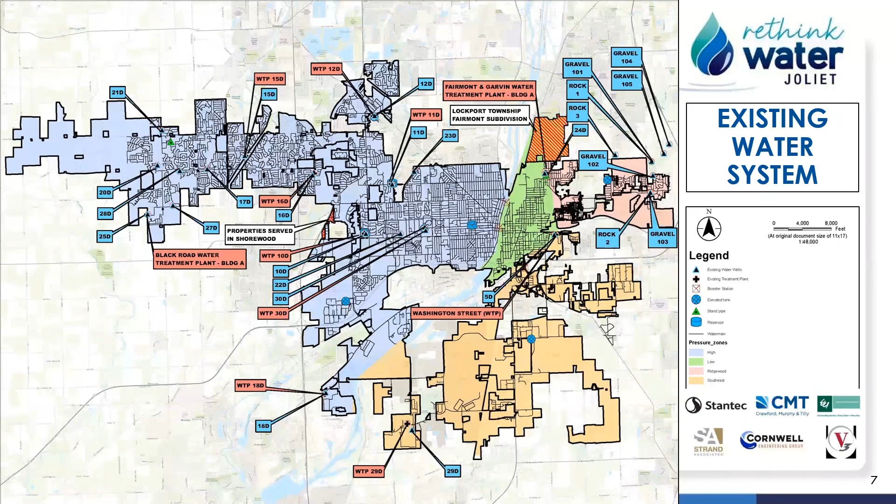This map shows the city's existing water system. It's important to note that water currently enters the system at multiple points throughout the city's 65 square mile service area. And when we switch to the Lake Michigan water, the water will then enter the system at a single entry point. So this will require significant improvements to the Joliet distribution system, which Teresa will discuss in more detail later on in the presentation.

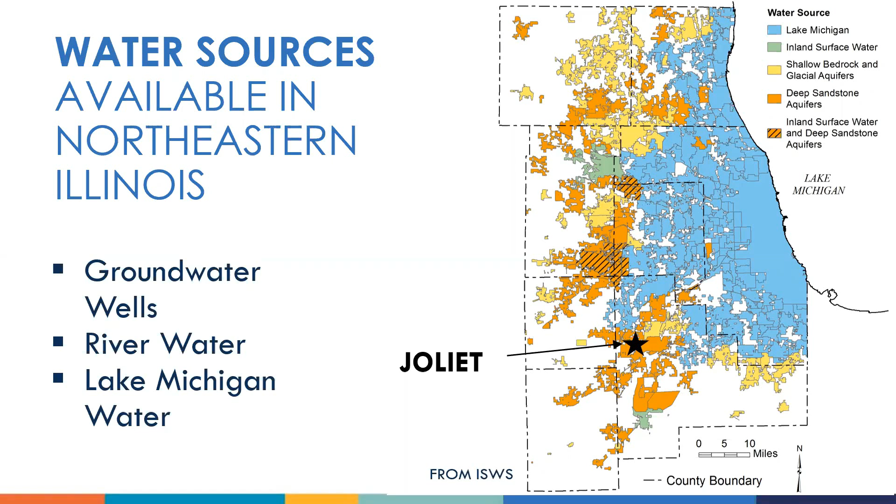Fortunately, in northeastern Illinois, we have multiple water source options. This map shows the communities in blue that get water from Lake Michigan, the communities in green that rely on river water, and the communities in orange and yellow that use well water.

Given the problem at hand, the city embarked on a two-phase study of alternative water sources in 2018. Phase 1 investigated all possible water source alternatives, including aquifer recharge, river sources, and Lake Michigan. These 14 alternatives were evaluated for water quality and water quantity. 5 of the water source alternatives were recommended for further evaluation during Phase 2. These alternatives included the Illinois River, Kankakee River, and 3 variations of Lake Michigan water.

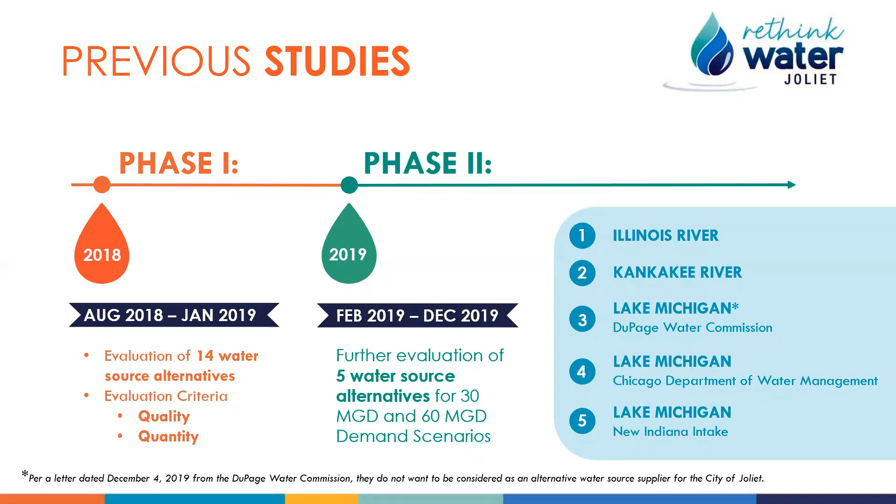All alternatives were evaluated not only for a Joliet-only option, but also for a regional scenario as well. There's a lot of work and information available about the Phase 1 and Phase 2 studies, and those are available on the city's project website, rethinkwaterjoliet.org. So please go to that site if you'd like more information on the alternative water source study.

The Phase 2 study results were presented to the City Council in November 2019, and in January 2020, the City Council selected Lake Michigan as the most reliable and sustainable water source alternative for the city. The Council then directed staff to further investigate 2 of the alternatives in 2020. These alternatives are the Lake Michigan New Indiana Intake Alternative and the Lake Michigan Chicago Department of Water Management Alternative.

To help guide staff and the project team as they moved forward with the alternative water source program, a strategic plan was prepared to identify the program's major objectives and goals. The city has a vision of being a leader in providing reliable and high quality water to our community. Our mission for the program is to provide this new water supply to Joliet and potentially the region by 2030.

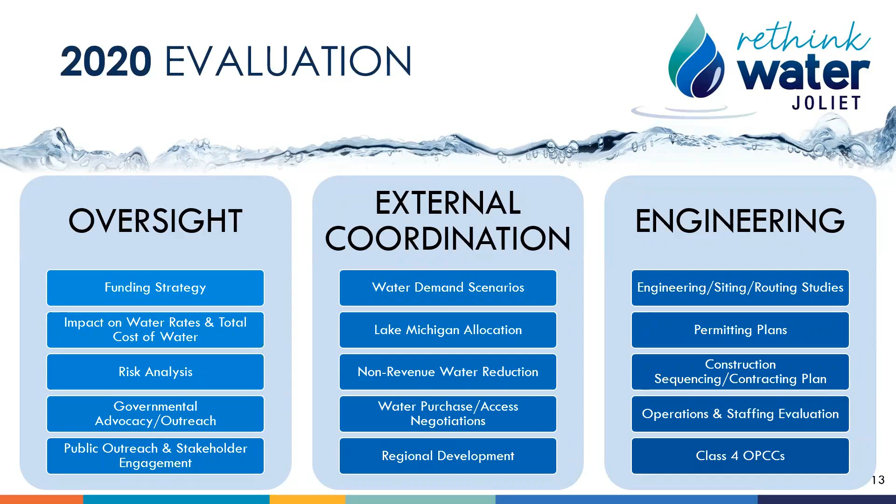So I specifically want to highlight the extensive public outreach that was conducted during 2020 in spite of the pandemic. We hosted 3 virtual stakeholder meetings and 3 city council workshops. A monthly newsletter was published and distributed to our stakeholder list, which includes over 1,000 people. We also used the city's social media accounts and billboards to get the word out.

And lastly, this month we are hosting these live virtual meetings as well as the online virtual events. And we really encourage everyone to please visit our project website for copies of all of these materials.

So as I mentioned earlier, Joliet has been evaluating the new water source not only as a solution for Joliet, but potentially the region as well. At the August 25th City Council workshop, the City Council supported the project team's recommendation of moving forward with formation of a water commission. A regional solution will benefit Joliet through cost savings from economies of scale, as well as by distributing the project risk amongst multiple entities.

This concept has the support of state agencies, as well as state and federal legislators. It's important to note that both the Chicago Department of Water Management alternative and the new Indiana intake alternative can be a regional solution.

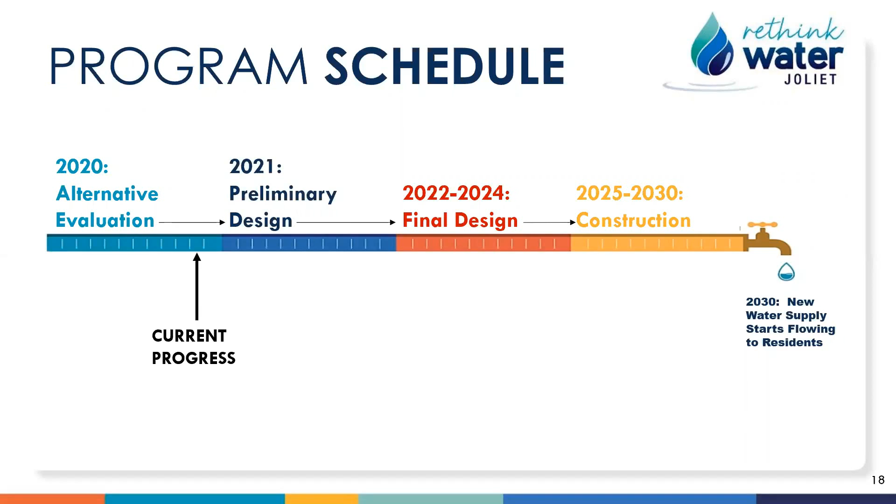So identifying and implementing a new source of water is not a quick process. Regardless of the option selected, we will take every minute of the next 10 years for design and construction before the water is flowing at residents' taps by the summer of 2030. So at this time, I'm going to turn things over to Teresa O'Grady, who is going to discuss the 2 Lake Michigan water alternatives.

Thank you, Allison. Good afternoon, everyone. My name is Teresa O'Grady. I'm with Crawford, Murphy & Tilly, and I will start off the discussion of the 2 water source alternatives by describing each alternative and discussing the implementation of them.

So the 2 alternatives for bringing Lake Michigan water to Joliet have been evaluated in 2020. The first alternative involves purchasing finished treated water from the City of Chicago and pumping it to Joliet. The second alternative involves Joliet developing an entirely new Lake Michigan water supply system through the construction of a new intake in Lake Michigan, accessed from Hammond, Indiana, and pumping raw water over 46 miles to Joliet for treatment.

As Allison mentioned, both of these alternatives have been evaluated for the Joliet only 30 MGD scenario, as well as the Water Commission 60 MGD scenario. So when I refer to Joliet's improvements for each alternative, what we're talking about would apply to the Water Commission as well as Joliet if that Water Commission is formed.

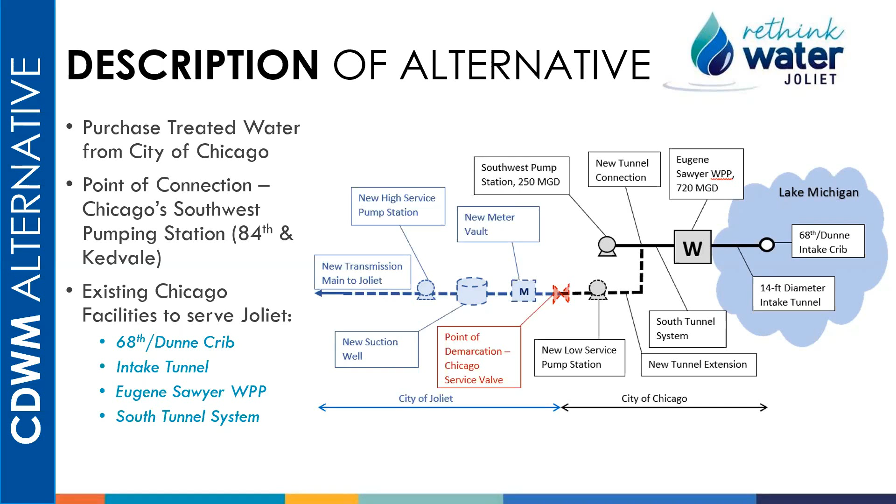After the low-service pump station, but prior to the meter vault, there would be a valve called the Chicago service valve that would be the breakpoint in ownership between Chicago and Joliet. After the Chicago service valve, there would be a meter vault before discharging the water into a suction well, which is a large underground storage tank, before it is pumped through the high service pump station and heads to Joliet. These new facilities past the Chicago service valve would be owned and operated by Joliet.

All of these new facilities would be located at Chicago Southwest Pumping Station site, with the new low service pump station and new high service pump station on the south side of the site, and the new suction well in Durkin Park west of the Southwest Pumping Station.

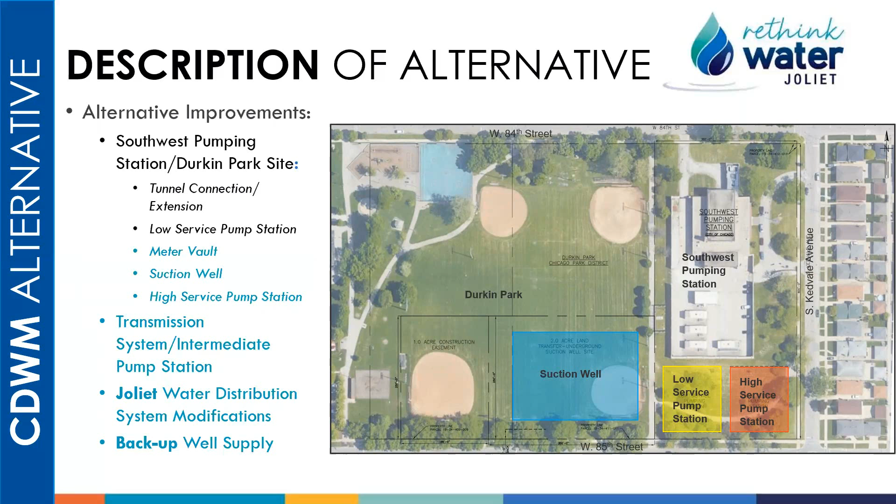So under the alternative improvements on the left-hand side of the screen, we've talked about the improvements at the Southwest Pumping Station site. Next we'll talk about the transmission system, the Joliet water distribution system modifications, and the backup well supply on the next slide.

So in this exhibit, Chicago's Southwest Pumping Station is located in the upper right-hand corner of the exhibit. All of the infrastructure outside of the Southwest Pumping Station site would be designed, constructed, owned, and operated by Joliet.

From the Southwest Pumping Station, Joliet would construct a new finished water transmission main between 48-inch and 60-inch diameter, depending on capacity, approximately 31 miles to Joliet. This is shown with the blue line in the exhibit. Given the distance, there would be an intermediate pump station along the route.

And then as it reached Joliet, there would be a receiving station that would serve as the entry point to the Joliet system, as well as the starting point for the Joliet distribution system modifications. The Joliet distribution system modifications are shown in red on the exhibit. These are the transmission mains required to distribute the new water source across the system for the 30 MGD scenario.

As Allison had mentioned, going from multiple entry points to a single point of entry requires extensive improvements in the system.

So for the 60 MGD scenario, a regional water commission network would be constructed instead of the Joliet distribution system modifications. And those are shown in the dashed green lines on the exhibit.

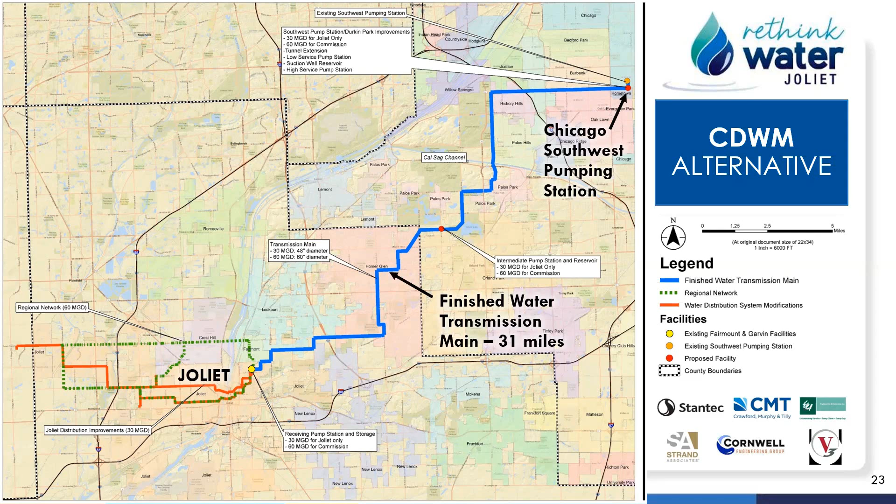So the second alternative that we're discussing is the new Indiana intake alternative. This alternative involves Joliet developing an entirely new Lake Michigan water supply system through the construction of a new intake in Lake Michigan accessed from Hammond, Indiana, and pumping raw water over 46 miles to Joliet for treatment.

For this alternative, the city of Joliet would enter into an access agreement with the city of Hammond, Indiana. As part of the 2020 evaluation, a preliminary access agreement has been negotiated with the city of Hammond. One thing to note, this is not a water purchase agreement. Joliet will not be buying raw water from Hammond.

This is solely an agreement that provides Joliet with access to and use of rights-of-way and easements in Hammond-owned or Hammond-controlled property. It is a 99-year agreement with 2 25-year renewal periods.

For this alternative, several improvements are required for its implementation. So let's look at the exhibit on the right side of the slide here. The water source is a new intake crib in Lake Michigan, and that's shown in the yellow star there. From the crib, there would be a 7,000-foot intake pipe tunneled to the shore in Hammond. There would be shore facilities in Hammond consisting of screening and pumping.

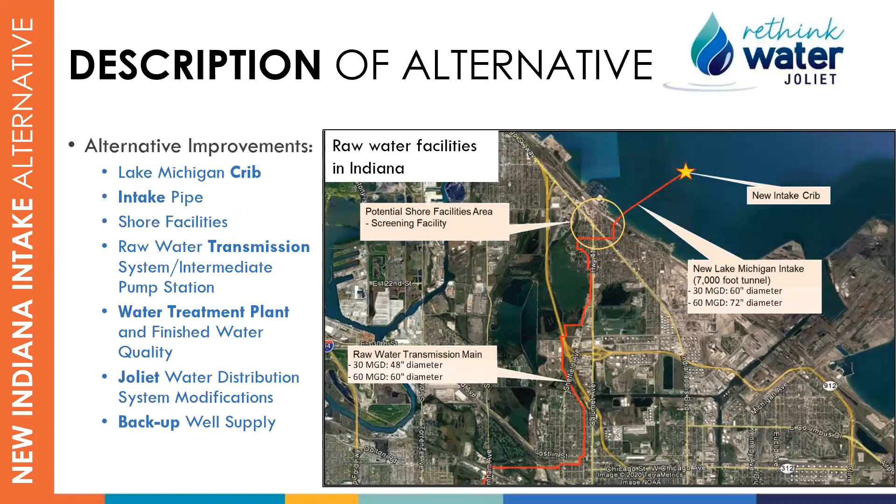In this exhibit, the new intake and crib is located in the upper right-hand corner of the exhibit. Once in Illinois, the raw water transmission main would continue to Joliet, and this is shown in the blue line on the exhibit. Again, there would be an intermediate pump station along the route. And then as the transmission main gets closer to Joliet, there would be a water treatment plant that would treat the raw water to drinking water standards. And this water treatment plant would utilize advanced water treatment processes capable of treatment of known emerging contaminants.

The pump station at the water treatment plant will serve as the entry point to Joliet system, as well as the starting point for the Joliet distribution system modifications, again shown in red on the exhibit. And those are the transmission mains, again, to distribute the new water source across the system for the 30 MGD scenario. For the 60 MGD scenario, the Regional Water Commission network would be constructed, and that's shown in the dashed green lines on the exhibit.

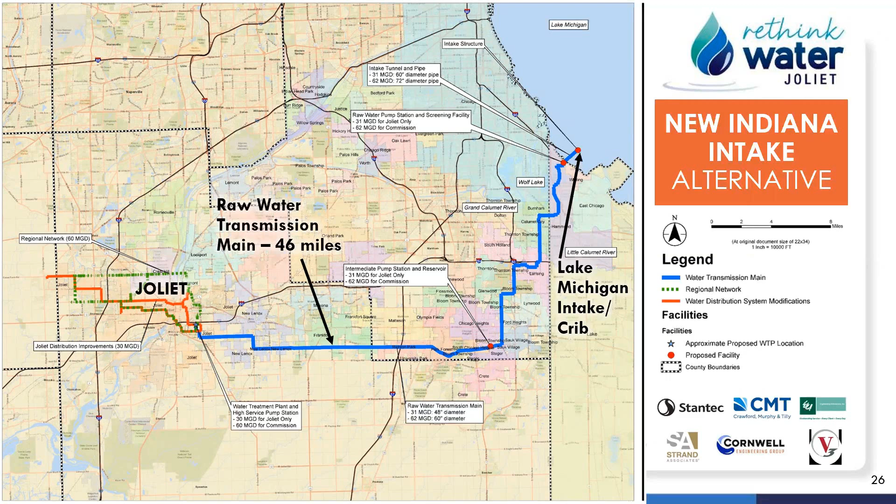Again, while not shown on the exhibit, improvements also include storage throughout the system. And also for this alternative, the city's wells would be maintained as a backup source in the event of a break in the transmission main. So that talks about the description of the two alternatives. Next, I want to talk about implementation considerations.

A key component of the 2020 evaluation was to look at the implementation of each alternative to make sure each could be implemented by 2030 and be online to serve the city of Joliet. We evaluated several considerations related to implementation, first of which was land acquisition. We identified sites that would have to be acquired, as well as the timing of land acquisition. For permitting, we focused on developing permitting plans and categorized them into three categories: overall permitting, site-specific permitting that would be for water facilities such as pump stations, and route-specific permitting based on the transmission main routing studies performed.

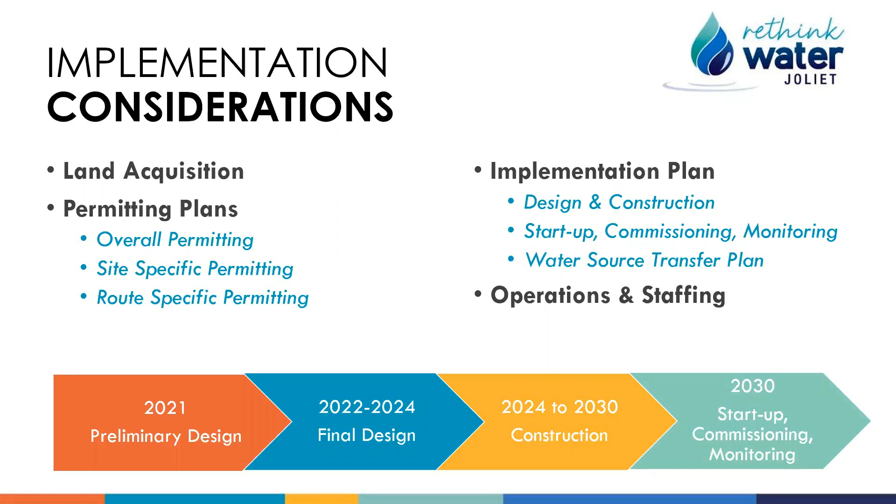Taking this into account, an implementation plan was developed for each alternative, noting design and construction, startup, commissioning, and monitoring, as well as the requirements for the water source transfer plan. In addition, staffing needs for the operation of the new infrastructure associated with each alternative were evaluated in comparison to the city's existing staffing levels. Staffing increases, if needed, were incorporated into the estimated operation, maintenance, and replacement costs for each alternative. All this was done to ensure that each alternative was feasible and could be implemented by 2030. So at this point, I'm going to turn it over to Joe Johnson to talk about the costs for both alternatives.

Great. Thank you, Teresa. So my name is Joe Johnson. I'm with Stantec Consulting Services here in Chicago and another member of the project team. My goal this afternoon is to provide a summary for you of the costs that will be associated with the implementation of either of these alternatives for bringing Lake Michigan water to Joliet.

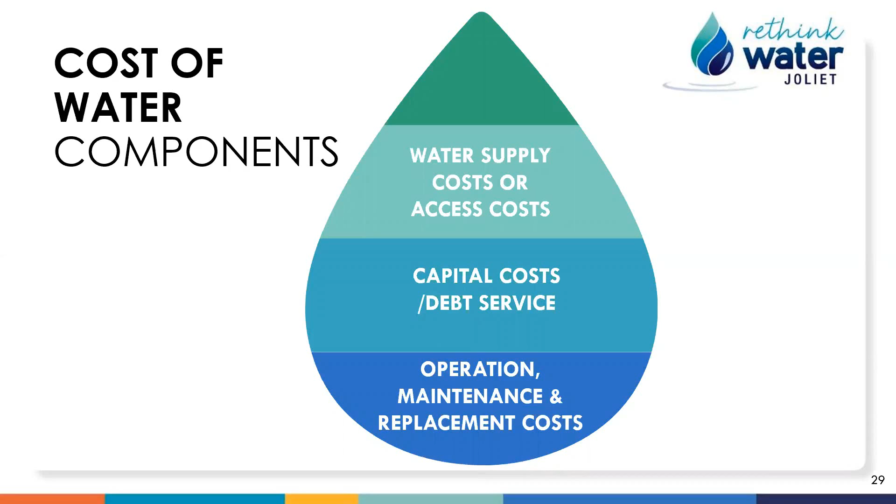So when we talk about the costs of this project, it's important to realize that there's more to that than just the capital costs of building the infrastructure. As Teresa has outlined, there are some water supply and access costs. There are certainly the capital costs and debt service associated with building and financing new infrastructure. And then there are the operation and maintenance and replacement costs associated with running the system well into the future. So we'll talk through each of these to provide a little bit of detail and perspective on how they fit into the overall cost of the project.

And so we have one-time costs for engineering on the order of about $7 million, and then annual payments for the purchase of water that would be about $27.5 million in 2031 for the purchase of the total amount of water required for Joliet under the 30 MGD option. And then by 2040, as the rate for water increases over time, that annual purchase cost for the water would approach about $36.3 million.

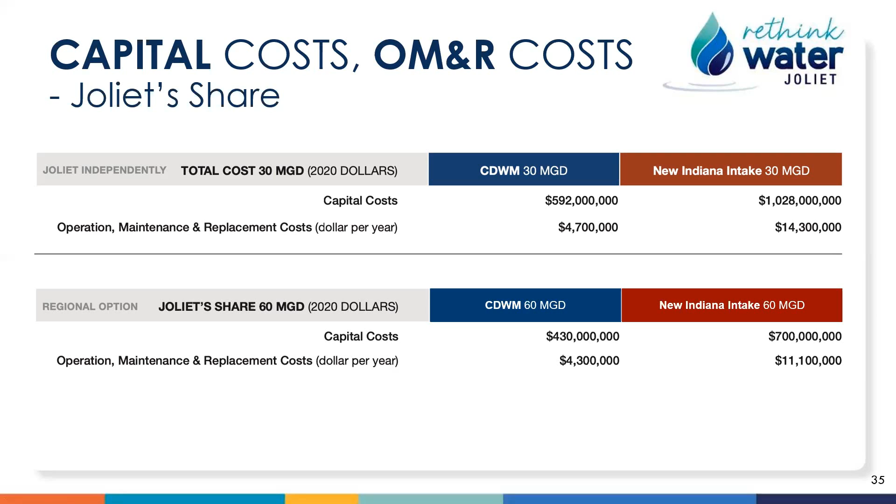So we've talked about the costs. Then the question comes up, how are we going to fund this work? How is Joliet going to actually finance this work and provide the funding to complete it? And the funding strategy that's been developed for the project really has three primary components. Joliet has looked at opportunities to maximize available low interest funding available through the federal government and the state government.

The second component of the funding strategy is state revolving fund loan money through the Illinois EPA. Joliet has been using this money extensively for other infrastructure projects. Again, the revolving fund program is set up to provide low interest loans to water and wastewater utilities in Illinois to help them finance infrastructure projects. This would provide another source of funding, and based on discussions with IEPA, we believe it could provide as much as $50 million worth of funding a year over a 5-year period during the construction of the project. So that's a very attractive source of funding for the program.

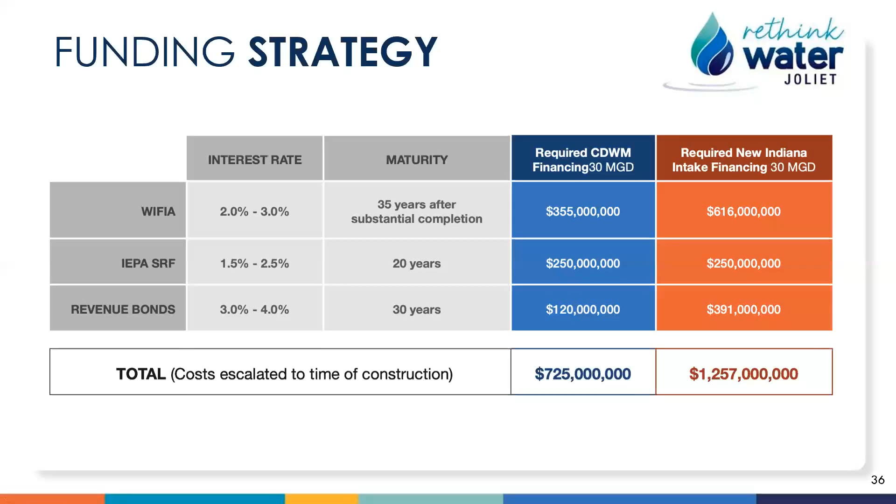So again, these are large programs with significant capital requirements. But Joliet has taken large steps forward in securing funding and positioning itself for attractive financing for implementation of the program. So we've talked about all this from the standpoint of the program, but what does this mean for the residents of Joliet? So before we jump into that, I thought it was important to take just a minute and review what the typical utility bill that the residents in Joliet receive includes.

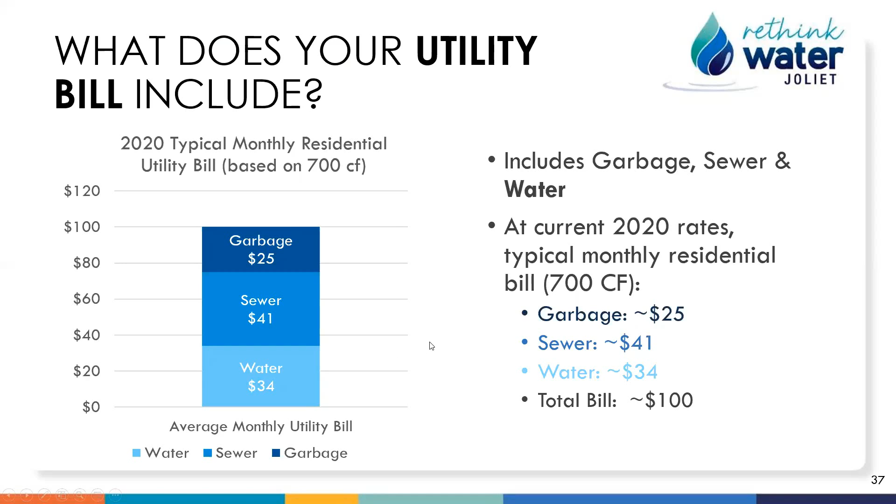So you see this does require a period of years starting very soon with relatively high rate increases in the range of 10 to 12% to provide the funding necessary for the program. As you get further out into the program, the rate increases begin to drop off a little bit for the Chicago alternative, given that there's less capital and less debt service associated with that alternative. By the time you get out to 2035 or 2036, when the costs have basically been financed, then those rate increases drop off to more of a maintenance level.

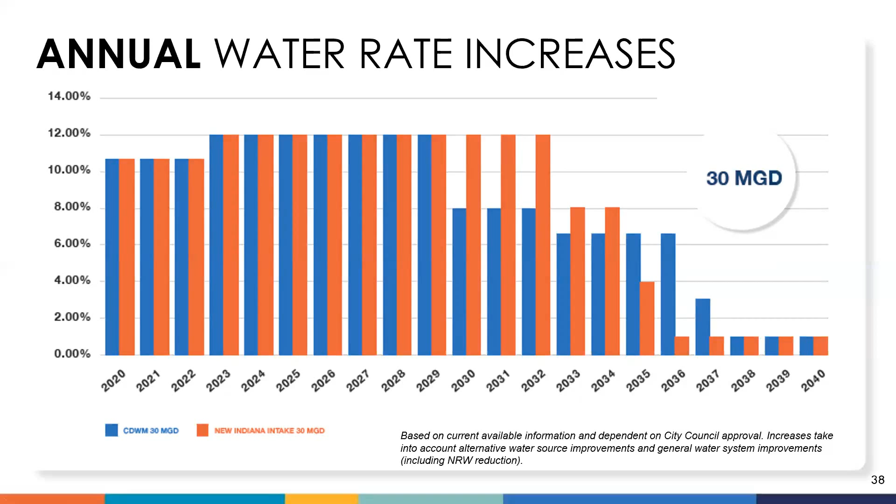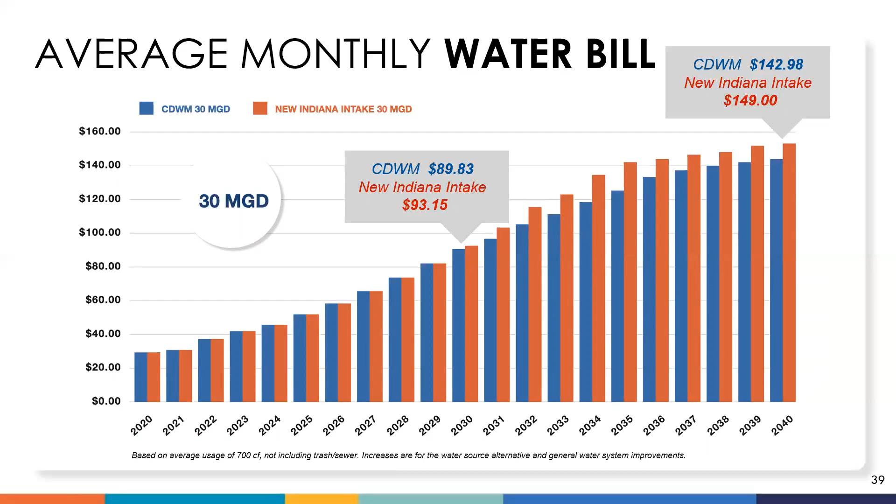When you look at the 60 MGD regional scenario, and again, look at the costs that are allocated to Joliet and customers in Joliet, again, you see the pattern of rate increases. Here by 2030, the typical bill for the Chicago alternative in Joliet would be about $79 per month. And the typical bill to a Joliet resident for the Indiana intake alternative would be about $75 per month. So in this case, in the larger regional program, the cost for the Chicago alternative is slightly higher. When you get out to 2040, that pattern continues, with the Chicago alternative being at about $123 per month, the Indiana intake alternative being at about $112 per month.

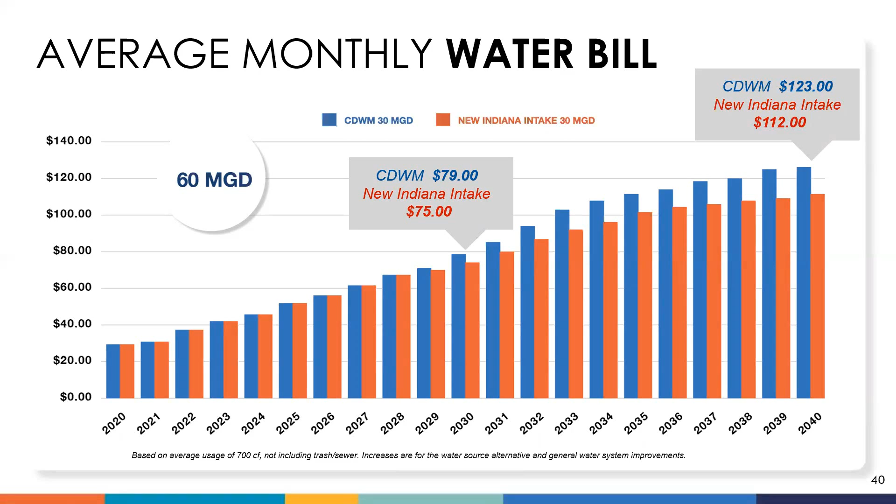Lastly, one of the other metrics that we've used over the course of this program to compare the alternatives is the 50-year total cost of water. So this is really an exercise through which we combine all the costs, the one-time costs, the annual costs, the debt service costs of each alternative over the 50-year life of the program, and then account for the time value of money. So there is some allowance that costs that occur later in the program are discounted back to a present value. When we combine all of those costs and compare the two alternatives, for the Chicago Department of Water Management alternative at 30 MGD, we're at about $1.63 billion for that overall alternative. For the Indiana intake alternative, we're at about $1.53 billion.

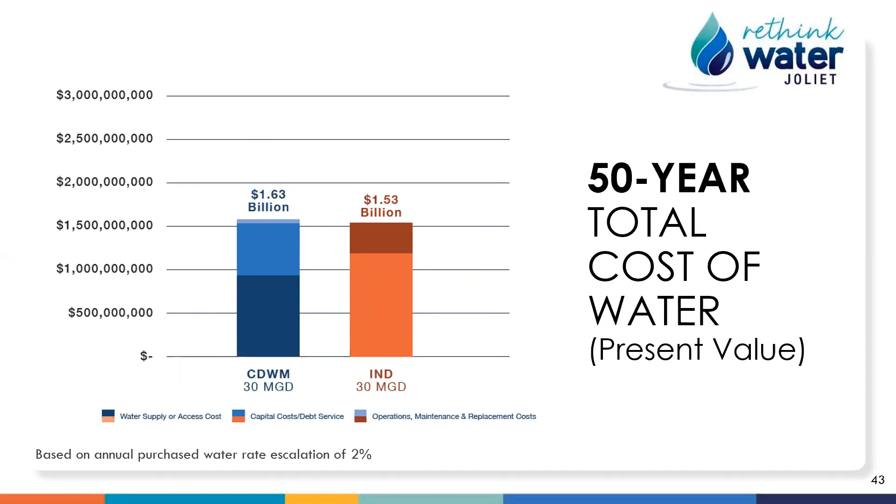So I provided you with a lot of numbers and costs. I'm going to turn it over to Allison now and let her walk you through the discussion of the business case for each alternative, the risk analysis, and the next steps that need to be taken. Sorry, we're having some trouble with the slides moving around, so I'll turn it over to you, Allison.

Thanks, Joe. Thanks, Joe and Teresa, for the information that you've provided about the two alternatives and the associated costs. So now I'm going to wrap up the presentation by discussing the risks and the business case for the alternatives, and then the next steps in the selection process and how you can get involved.

The first is related to the agreement terms and conditions. One risk that's frequently been discussed with this alternative is the risk that Chicago could potentially sell the water system to a private entity. We feel we've mitigated this risk by adding a statement into the preliminary agreement that Chicago will not sell the water system without approval from Joliet.

Another risk identified is a change in administration. So it's important to note that this agreement is anticipated to be signed next fall, fall of 2021, and is for a term of 50 years, which would secure the terms of the agreement for that duration. So in that way, we feel we have addressed that risk.

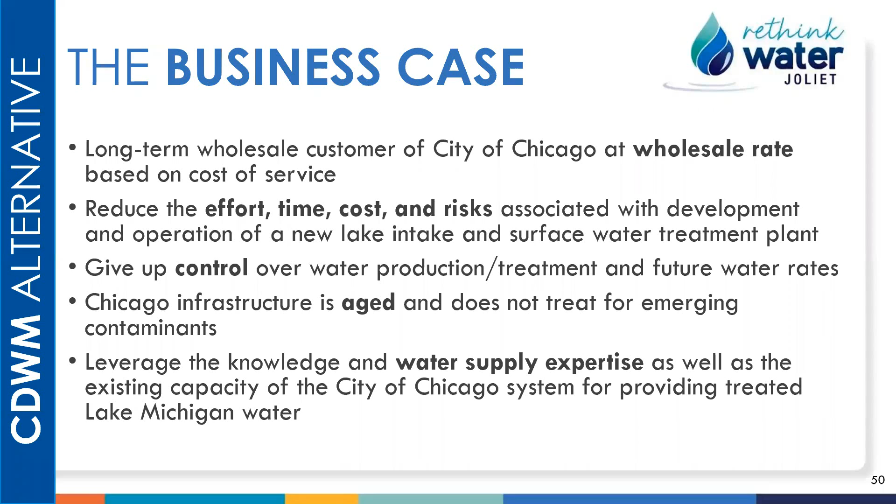Joliet would give up control over water production and rate setting, and the city's system is aged and does not treat for emerging contaminants. However, we have the opportunity to leverage the knowledge and water supply expertise of the City of Chicago and benefit from participation in a large regional water system.

For the new Indiana intake alternative, it's a very bold plan with construction of over $1 billion of infrastructure. With this plan, the city would have the responsibility and liability for designing, constructing, and operating this infrastructure. We would have a long-term, over 99-year relationship with Hammond, Indiana for access.

This alternative provides brand new infrastructure, which would not require significant improvements for 50+ years. In addition, we would have control of water treatment and would utilize an advanced water treatment process that could treat for known emerging contaminants. The magnitude of the improvements is significant, and there are added complexities due to crossing state lines. However, this alternative offers the city complete control over program implementation, operations, and rate setting.

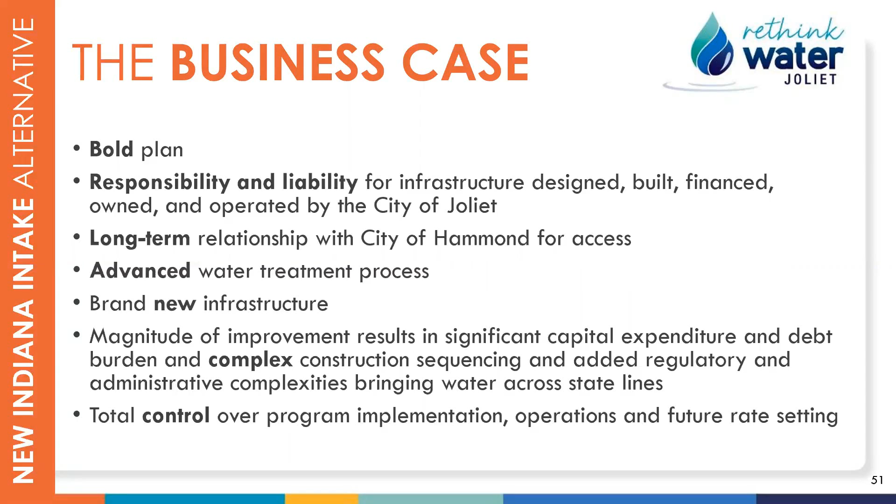So the city is fortunate to have 2 very good alternatives to consider. This will definitely not be an easy decision for the city council.

This slide shows a roadmap for the next 2 months. In the first 2 weeks of December, we are focusing on obtaining public comments via the 2 live meetings being held today and tomorrow, as well as the online virtual event, which is going on through the 14th. The project team is also working on providing supplemental information that will dive deeper into comparing the 2 alternatives.

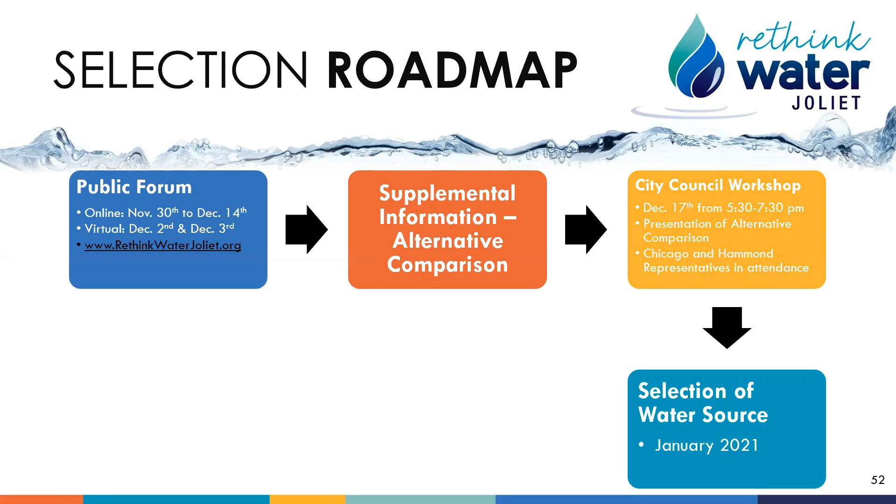On December 17th, we will host a City Council workshop at which we will present the comparison information and have representatives from the City of Chicago and City of Hammond available to show their support and answer questions. In January, the City Council will formally vote to select one of the alternatives.

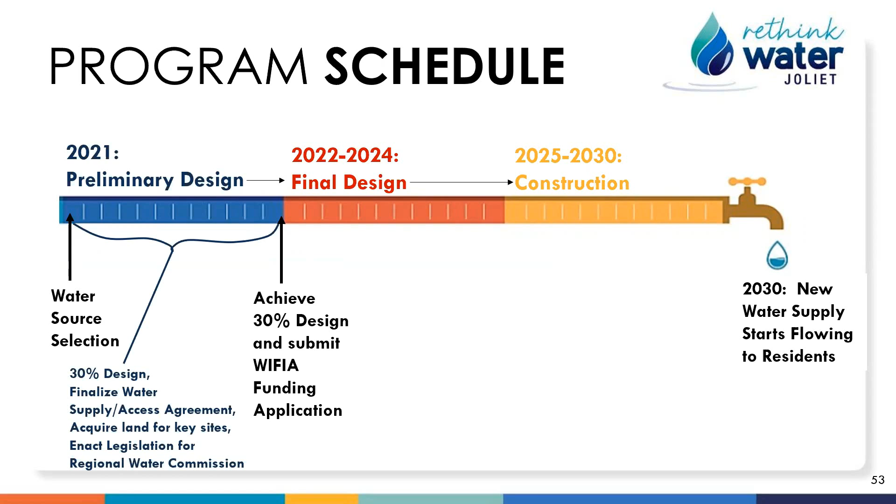As you can tell from the presentation, there's a lot of work that needs to be performed during the next 10 years. 2021 is a very critical year with many significant milestones that must be met. So it's imperative that a water source be selected in January to ensure that the new water source is online by 2030.